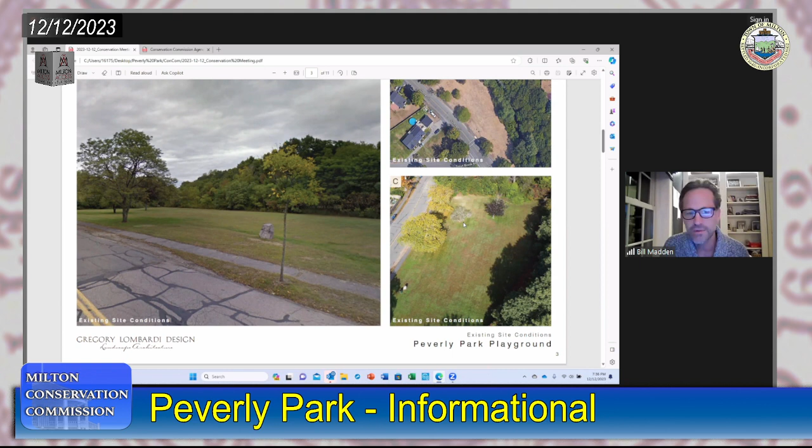To start out, these are some existing condition site photos, and I'm sure you guys are aware of the site. Currently it's just a mown lawn. Some of the activity that occurs here is dog walking and some ball play, but our intent from a neighborhood standpoint is to activate this and create a resource for active play for the local residents and the regional residents of the town of Milton.

The first setback off the brook is the 50-foot off-brook setback, which is this line here. And the 100-foot riverfront area, which is the setback here.

There are a few trees on the site. One is actually dead, I believe, and a few are still struggling, but we're going to try to protect those and enhance them as we bring this project forward.

What you're going to see in a moment is that we've used this 100-foot setback as our prime location for the disturbance of the site. Anything outboard of that is where we're proposing to have the playground, so we can protect the sensitive site inboard of that 100-foot setback.

This image is showing the relationship of this play space, which is here, off of this 100-foot setback, which is here. One of the things we're interested in, being sensitive to the ecology of the site, is that currently a mown lawn is not necessarily good for runoff or the carbon footprint of the site.

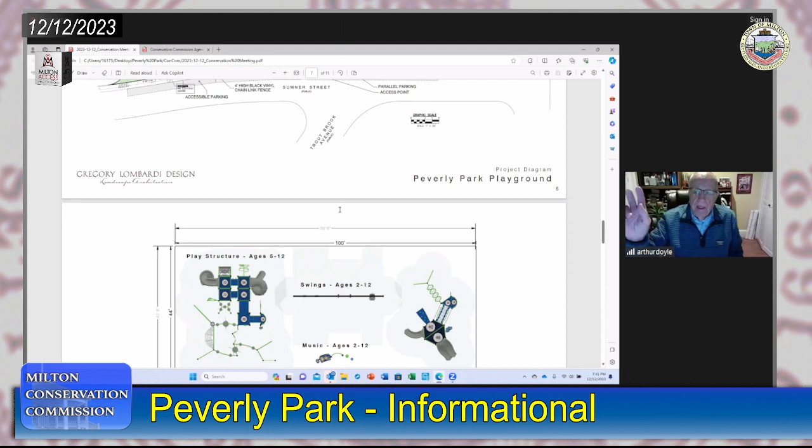And we can come back to this. If I may, can we go back to that frame for just a moment, please? I heard you say that this area with the blue line and the arrow is a mown pathway. Correct, but the citation on the map says no-mow pathway, so you may want to correct that. That's very good, thank you.

So the idea here is red fescue turf. Have you guys used that or made proposals to include that? So that's what we're suggesting to occur here, so it wouldn't necessarily have to be mown. The surface of this area will probably blend into this, but the concept is to make this as minimally intrusive from an ecological standpoint as possible, and it would be a connection to the footbridge.

But we also have a pathway that goes around the pond, up toward where that arrow ended. Correct, so that mow pathway, those two mow pathways, would be very appropriate for connectivity to the entrance into Pope's Pond. Thank you, yeah, that's our intention.

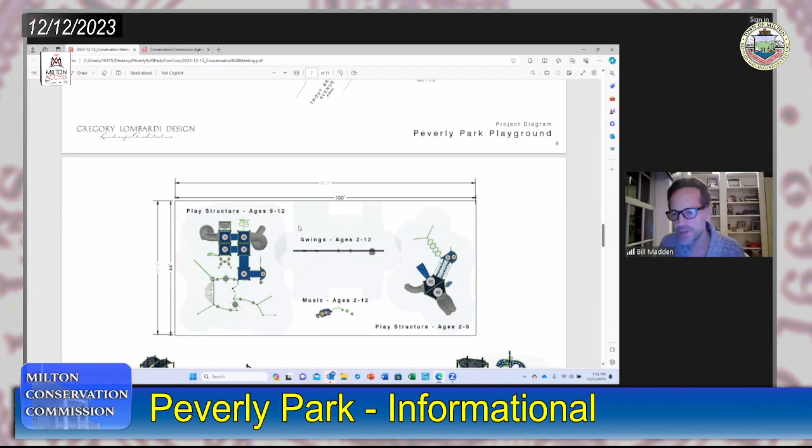Exactly. Okay, I just want to show you some imagery, some precedent images, and then we can go back to the plan. I would love to hear the commission's comments on this. So just as a point of reference, in the play space is more conventional play equipment.

And you can start to see sort of what this layout would be. This would be potentially the troweled rubber surface, fall protection. You can start to see how this is a potential layout. We're meeting with you guys at a very early stage—we haven't even picked the equipment yet. We just did a layout to get a sense of how it would feel in the space.

What is—if you can go back to the previous slide, just scroll up a little bit. No, if they go back, you're right there. Exactly, what is that surface? Is that a pervious surface? Yes. Have you been to Shields Park recently—the new Shields Park? It's the same surface that's at Shields Park. It's a troweled rubber surface, essentially.

And it is pervious—it's impervious. So it does not, you'd have to have some drainage plans to see where the water goes since it's impervious. So the water would sheet off of this. Sure, it would. Is there an elevation change there? My memory is it's pretty flat. It is relatively flat. We didn't want to get too far and start designing the site topography at this point, but we'll start to illustrate where the site is drained for sure.

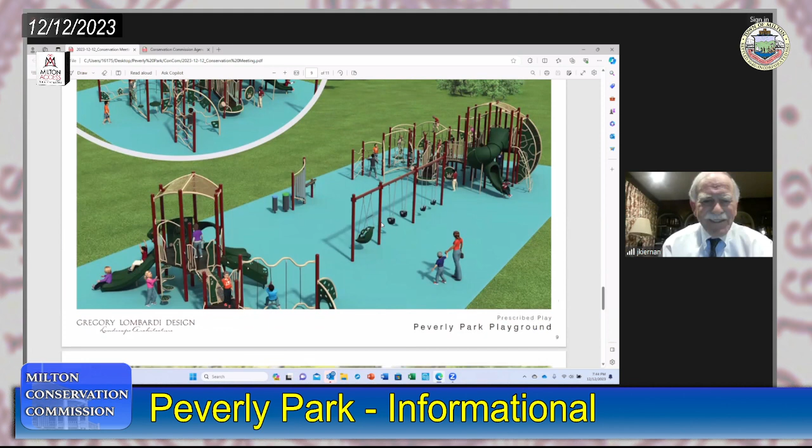Okay, I know this is just informational. Yep, but that will be a question you'll get. All of your comments are valuable for us at this point.

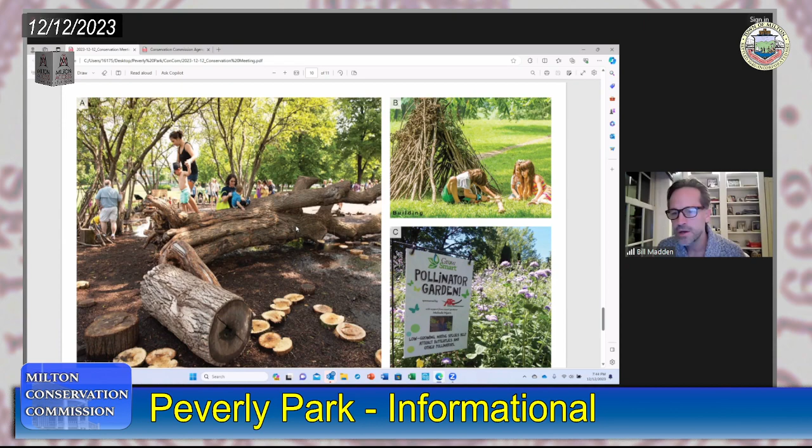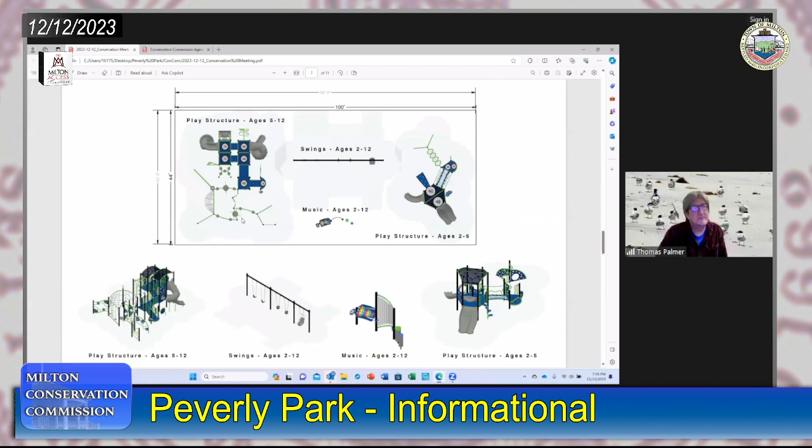That concept of nature play was the idea of turning the current—I'm going to flip to it quickly and then come back to that slide. The idea of taking this zone right now, which is all grass, turf—we have a rain garden here, and John, that sort of answers part of the idea, was that we would pitch some of the water to this low area. But again, we would need approval to modify this grade, so that's a conversation down the line about what level of intrusion we could have into that portion of the site. But the concept was extending that landscape so it would allow for natural elements to be within it, while at the same time, from a social neighborhood standpoint, play could occur.

The notion of adding pollinators, Joe Pye weed, a lot of different native species in here to make this something really special. There's also a concept of integrating this landscape with the local public schools and using this as a learning opportunity with their pollinator gardens. This was the concept of the mown pathway that would be flanked potentially by meadow.

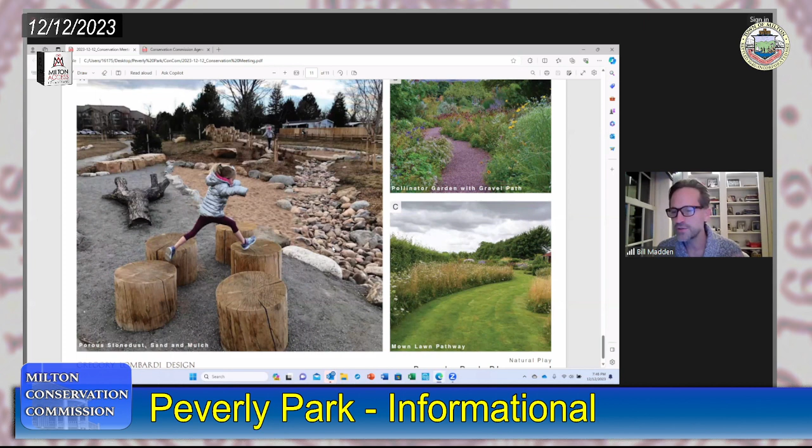These types of play environments—there's not prescriptive play equipment, but you can integrate drainage structures in, with this environment where kids play. It could be a really cool thing that integrates the idea of a very sensitive ecology with the idea of the social ecology of Milton. And that's what we wanted to share with you guys at this point.

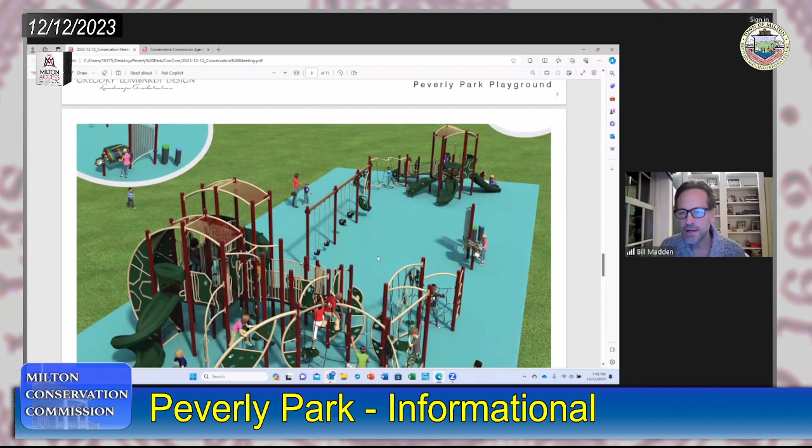So I want to go back to the plan, and I'd love to field any questions or concerns that you guys might have about this. I'm going to stick with this one at this time, just because I know that funding is available for us to execute this project. So I'm all open ears on what comments or concerns we might have at this point.

Sure, I can make a comment—I think your plan is pretty accurate, because I think it was the 1st of December, or maybe the 2nd, there was a team from Northeastern University School of Engineering out there on a site walk, at which Chase Berkeley was there as well, and I was there. We were trying to figure out where the bridge is going to go. And if you look at the top, where you can see the metes and bounds and that sharp point that's white above the blue area.

If you can move your cursor—yeah, right there, exactly right. That is what I referred to as a pinch point of private property, and that's probably the closest the property gets to Pine Tree Brook. That's approximately the location of wetland flag number 60 that's already been delineated there, and that's ballpark the area where the bridge is going to go. Okay, so your design here is prescient.

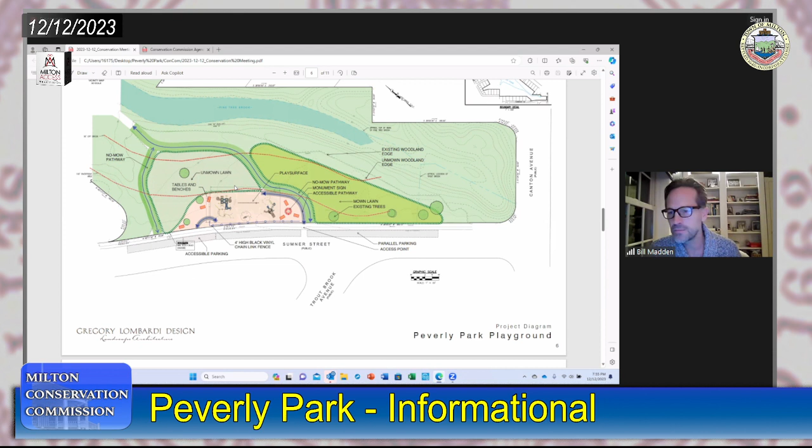Well, if there aren't any more comments or thoughts, I just wanted to thank everyone for your time. We wanted to share this with you because we know this is a very sensitive site ecologically, and also it's such an important site for this neighborhood. So we wanted to make sure you had your eyes on it, and I'm sure you'll be seeing it again once we begin to refine this design over the next few months. Bill, thank you very much.

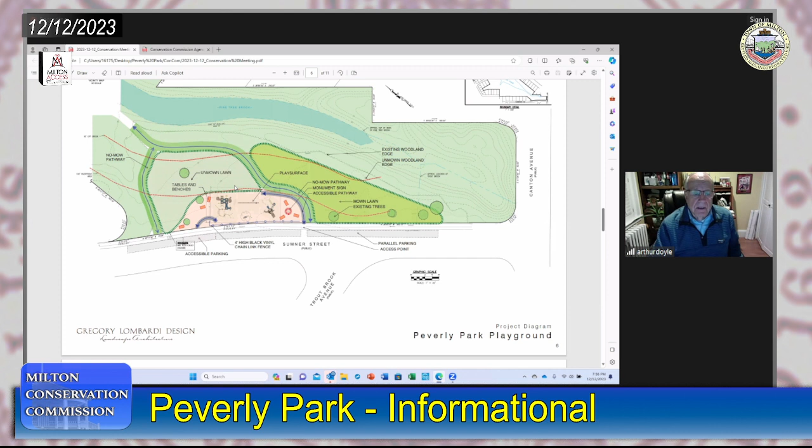Arthur, anything? Or we can move to the abutters or members of the public that have a question or comment. Just to let Bill know, as a reference point, I live next door to the park, the playground at Andrews. So I'm pretty familiar with what you're proposing here, and it really looks good. Great, thank you.

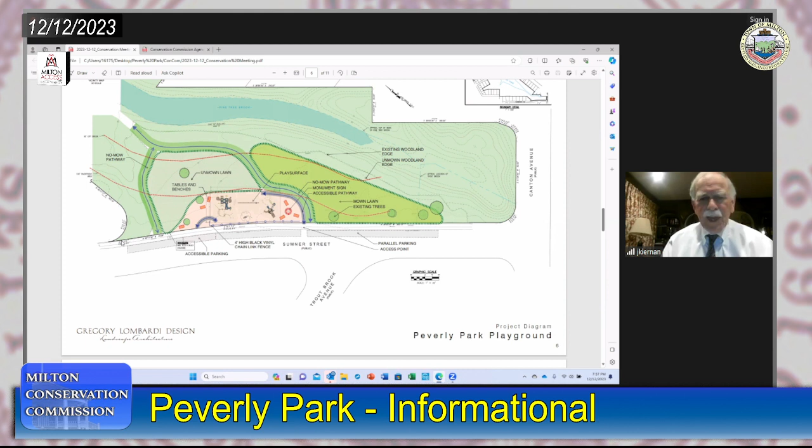Next on the agenda is number 2, request for certificate of compliance at 339 Hillside Street.

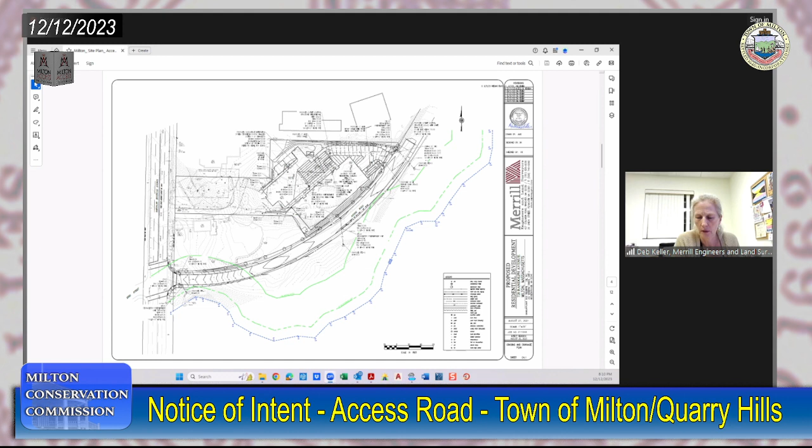So the additional information you're going to get, do you expect to have that, Deb, by the January meeting? When do you think, Rob, you'd be meeting with Natural Heritage again? Well, it's going to be a process, to be honest with you. They've requested some general information; we submit the information, and then, as our discussions continue, Deb, they decide whether it's a take or not a take.

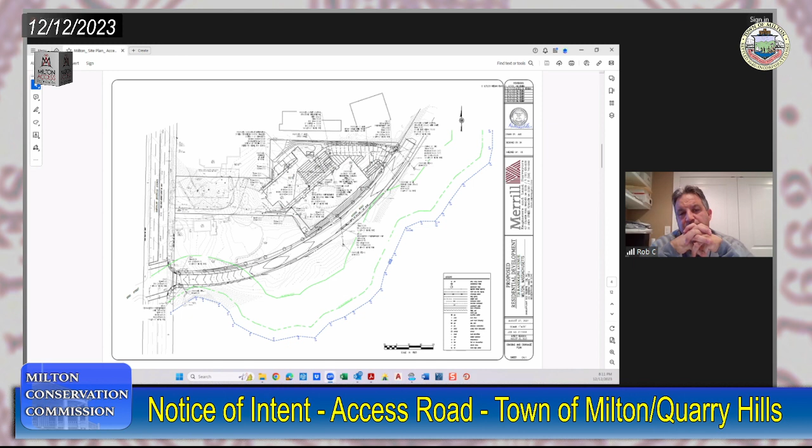And then if they do decide it is a take, it could be a fairly longer process. It's a little complicated too, because I don't own the access road, the town does. And they want to know about any pending projects, basically the extension of the access road, the animal shelters. So, yeah, I wouldn't say January—if we could extend it further out, that'd be possible.

Well, we can continue it until February if you'd like, but I don't want to slow the process down. Yeah, so why don't we do it this way? We continue it until February, but if you get the information faster than you think, we can move it to January.

All right, so at least for the record, we'll continue it to the February meeting, which is—I don't have the date, but it's the second Tuesday in February.

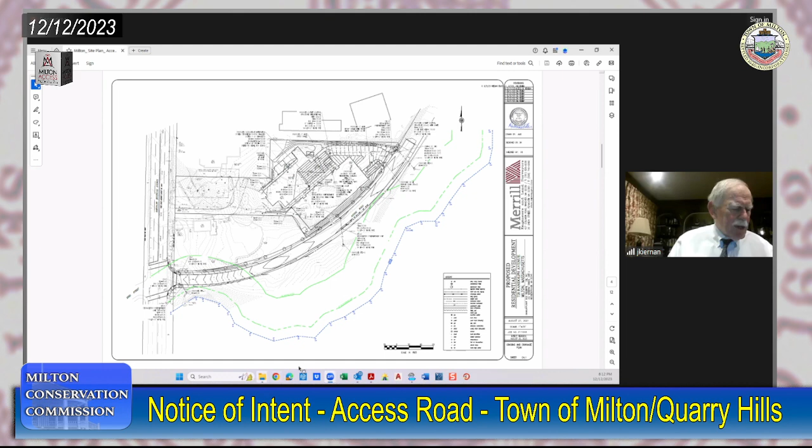Let's go back to number 2 and see whether or not Nicholas has gotten by his technical problems.

Hello, can you hear me? Perfect, there you are, good. I don't know what was going on before. Sorry about that. All right, could you hear us? I could hear you the whole time. Absolutely. Okay, all right, well you're on, and you can screen share if you need to.

And by the way, thank you for sending that—it was certainly clearer to me when you sent the second plan. It might have been the same plan, I just could see it look better. Yeah, when we scan them in, sometimes they don't come through as boldly as the PDF version originally does, so that was not a surprise, but sometimes it's better than others.

Anyhow, I don't have the ability to share my screen right now. I had spoken with Steve about this yesterday, but if someone else could put the plan up, that would be helpful. It's not necessary as far as discussing what was going on out there, though. I just basically had some questions. So Steve, if you could share the screen.

Oh, my name is Nicholas Ling with Grady Consulting, by the way. I didn't actually introduce myself. Thank you, Nicholas. Okay.

While he's looking to share it, I can comment for the public's benefit. We were at the site as a commission in public meeting. Part of the project was to disconnect a water line, essentially going from Hillside Street through the backyard, through the Hillside property to your backyard, and now the water line is coming in off of the driveway. Is that correct? That is correct.

Who is the applicant or the presenter for the applicant? Maria Johnsenberg from AECOM. We're representing DCR, the applicant, and Tom Bolton from DCR is also on the call. Thank you very much and welcome Maria and Tom. Thank you. Maria, I've made you co-host, if that's okay with you. Yes, that's wonderful.

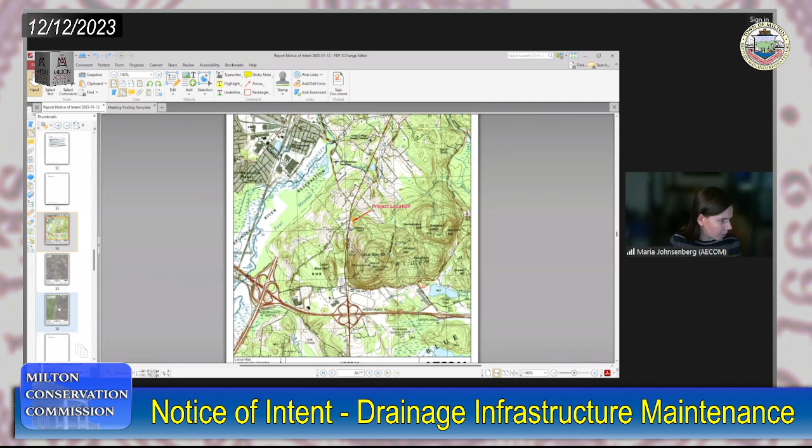We are here to discuss some drainage infrastructure improvements that are needed at the Blue Hills Reservation. So this is the project area, and this is the greater reservation. You can see where it is. It's along Canton Ave, or Route 138, off of the Green Street parking lot area. Here's an aerial picture of it. So here's the parking, and the drainage infrastructure is over here. If I may add, that's the north trailside parking lot. Yes, thank you.

Since this is maintenance of existing drainage structure under the Wetlands Protection Act, it does qualify as a limited project. That said, we are meeting all of the performance standards for resources that are there. But before we delve into that, I wanted to give a little site history. The retention basin here was created in the 1960s and has been cleaned out at least 3 times since then, most recently around 2006. And somewhere between 2006 and now, the vegetation in the basin started being predominantly wetland vegetation. So we have delineated this area technically as a bordering vegetated wetland, but the work being done is only going to remove the upper layer of sand that's part of the retention basin. It's not going to actually disturb any hydric soils.

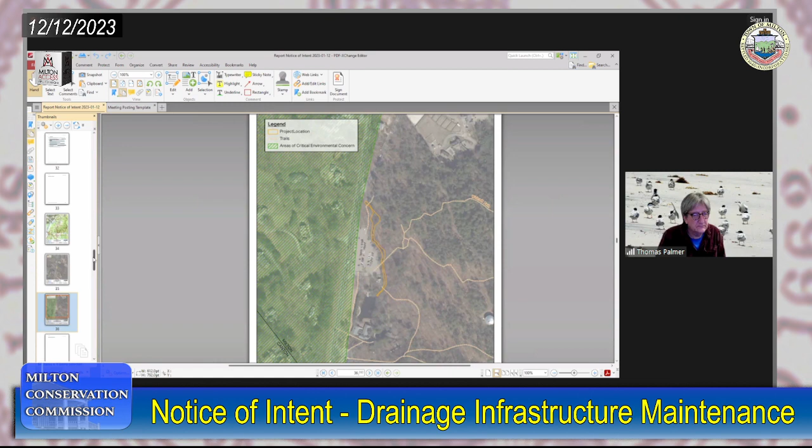So it's a weird spot. It's technically man-made, but it's developed some characteristics over time. There's some small gravel there as well, folks. Yes. I'm just going to go over to the plans to give us a better idea.

While you're doing that, may I ask what the predominant wetland vegetation intrusion is? My apologies, I don't have that right in front of me, that's a little earlier in the narrative. As I remember, jewelweed was there. There's a couple of other herbaceous species. For trees, we have Norway maple and catalpa. For shrubs, it's mostly white pine and glossy buckthorn. And yes, it looks like the herbaceous layer is primarily jewelweed. Sorry, I did not personally delineate it.

No, that's okay, got what I want. I mean, at least a couple of those are invasive species. It's not a particularly diverse spot or ecologically helpful. I read that section, I just wanted to make sure it wasn't intruded by Phragmites as well. No. Thank you.

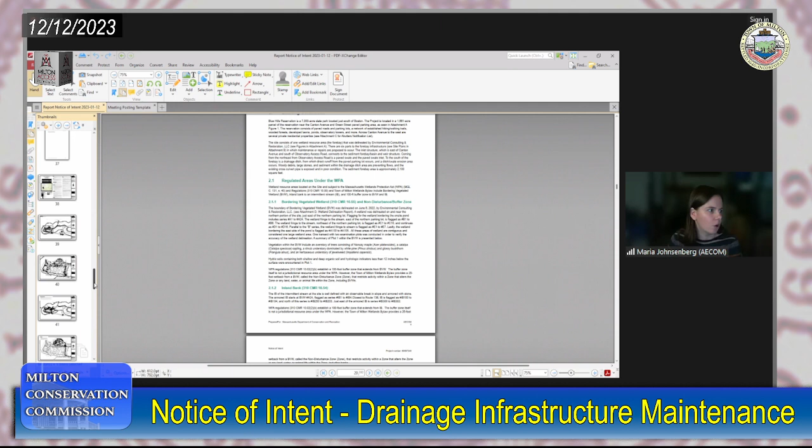So just to give you a clearer idea, these are the existing conditions. This is where the retention basin is. There's an existing concrete weir structure, and the stream that runs through the detention basin goes alongside the parking lot. There's a little bit of debris removal proposed up in that direction, but it's literally just taking stuff off the surface of the stream. There isn't excavation involved, so for simplicity I'm going to focus on what's going on in the detention basin.

So as I said, these are the existing conditions, and this is the excavation plan. DCR is proposing to remove the upper 6 inches of sediment and sand that has accumulated here to bring it back to the elevations it's supposed to be at in order to function correctly. As I said earlier, there is no hydric soil being removed in this, it's really just the sand. The sand or sediment will be removed, staged on site, and then put back in once the other junk has been cleared out.

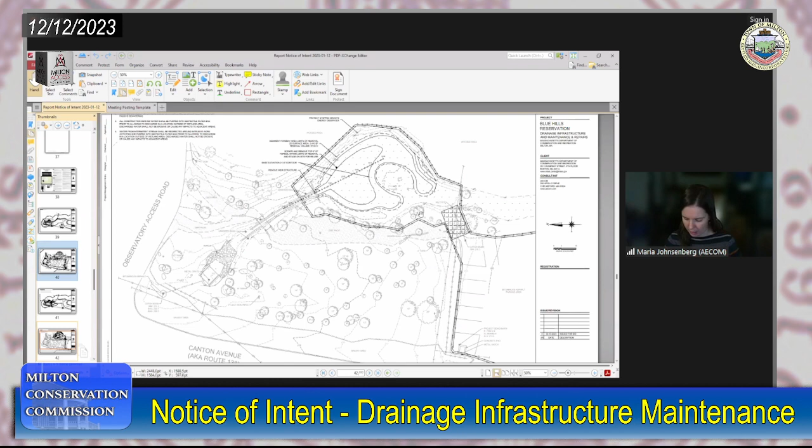I mentioned there's a stream that runs through here, and when the grading is done, part of reconstructing the inside of the basin is to put down erosion control fabric along where the stream channel typically is, to try to keep it from filling in so quickly and to maintain it better. We'll also be revegetating this disturbed area with native wetland seed mix. Below a certain grade we'll use an emergent wetland mix, and above that we'll use a more typical New England wetland mix.

In addition to cleaning out and regrading the sediment basin, we're also proposing to replace pieces of the weir. The existing concrete weir will be replaced with granite slabs, and a portion of the channel will be saw cut and replaced because it's falling apart. The concrete portion of the weir will also be jet cleaned because there's a bunch of sediment stuck in there. This is all just to make this existing stormwater feature function more smoothly, so we can actually manage the stormwater from the reservation and the parking lot the way it's supposed to.

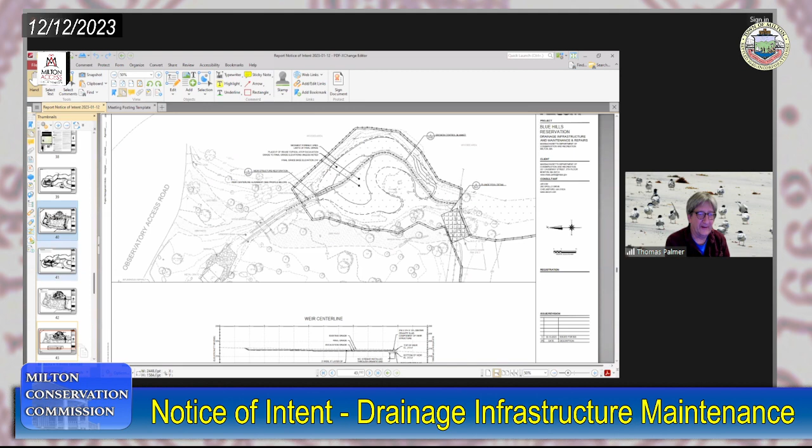So this is the bigger plan. I was focusing on this area because this is where most of the heavy lifting is going on, but this is the stream that goes up here that I think you're asking about with the little bridges. Yeah, there's a footbridge upslope of where you're working. Do you know where that bridge is exactly on here? Are we talking about the footbridge that goes up to the Trailside Museum, or a small one? It goes to the parking lot, and crosses from the parking lot to the so-called border path. So if you're looking at this plan, it would go from the bottom toward the top and then curve left.

I didn't see it on one of these plans. The only bridge that I'm aware of would be right behind the bathrooms. No, this is down at this end, because I've come out of the reservation many times and cut over to the parking lot on this trail, coming down the border path. Just to the point where you can see the parking lot, you can cut over and step over this brook on a little bridge, but you're not familiar with it?

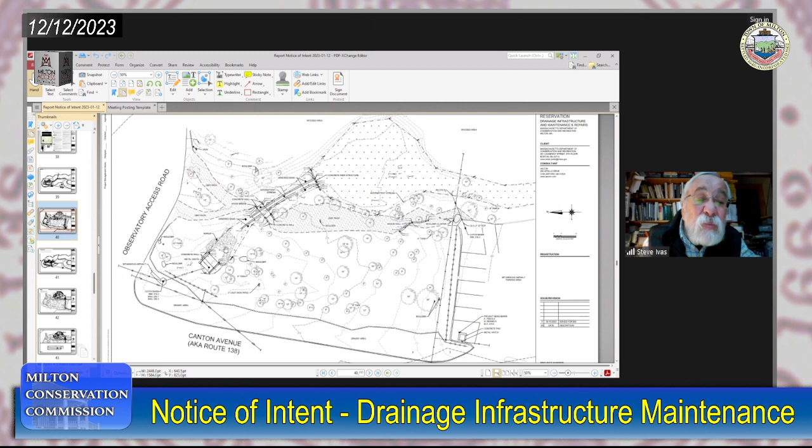It's on one of these plans, Tom. It's shown on this plan, on the left-hand side. Okay, I know where it is. Yeah, there it is, right there. Where? That's on the left. Yes, so that's downstream of the weir. Oh, right here. Yeah, that's correct. You're right, I'm sorry, I thought it was the other side.

I just want to point out, if you walk up that path toward Observatory Road, it's very eroded and a lot of water breaks out there. Have you noticed that? A lot of water comes down that slope, coming down Observatory Road. Yes, there's a paved swale that dumps into the sediment basin that's coming from there. It also breaks out of the ground too, and a lot of tree roots are exposed because material has been carried away, and it breaks out.

And it might be because there's a pipe that leaks. There's a big tank up the road there, presumably with infrastructure, piping associated with it. Do you know where that piping is? No, I don't. What kind of piping did you say broke out? Well, there's a pressure tank if you go up Observatory Road. Yeah, there's an enormous tank in the woods. I am aware of that. Well, I don't believe there's been any flows from domestic water or that tank, to my knowledge, anyway. I've never been told that.

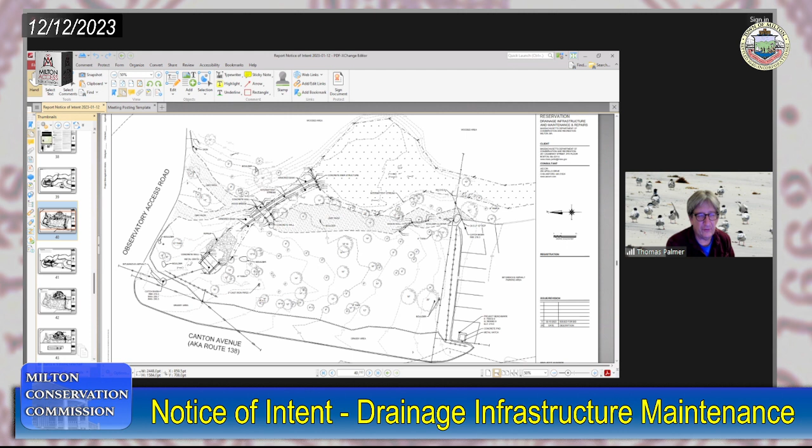Well, just the place I pointed out, everybody knows the water comes out of the ground there and washes the trail away. Everybody uses that area. So I'm just wondering how it might affect your plan. It seems like it won't in any particular way, but could you tell me where you think all the debris is coming from that's getting into your system?

Upstream, so it's coming from the brook and from the pond. This stream originates from the man-made pond in front of the Trailside Museum. And sheet flow from the parking lot area too, I would think. Yeah, I would agree the parking lot gets sanded sometimes and might contribute sand. There's an extremely large amount of sheet flow that comes from down the mountain during rainstorms too, only during rainstorms, that's probably washing silt and debris down to the brook that runs parallel with the parking lot, which eventually ends up in the sediment basin.

So after thinking about it a little further, I think that's probably the major contributor to most of the sediments coming into this basin. All right, well, I'm glad that you're getting after this, and it seems to me you're doing it appropriately. Thank you.

Any other comments, questions from commissioners, or members of the public? I just wanted to compliment staff, if I may, Mr. Chairman, on the quality of preparation. Good, very helpful, well said, thank you. John? I'm happy to see this being done, okay? I'm happy to see it being done. Oh good, yeah.

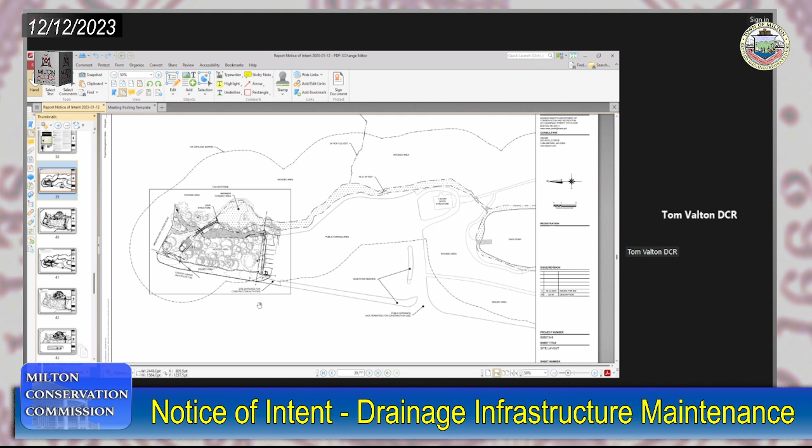Now, the only question I've got remaining is that when we issue an order of conditions, we do have standard conditions to refuel and store hydraulic equipment outside of our jurisdiction. You've got plenty of parking space there. Tom, do you think that's an issue, or Maria? We have a designated laydown area within the plan set. It's mainly near the entrance and exit to that parking lot, on the north end side. We were going to fence off an area there. That's not an issue, to answer your question. We can certainly make sure to keep the equipment outside the buffer zone.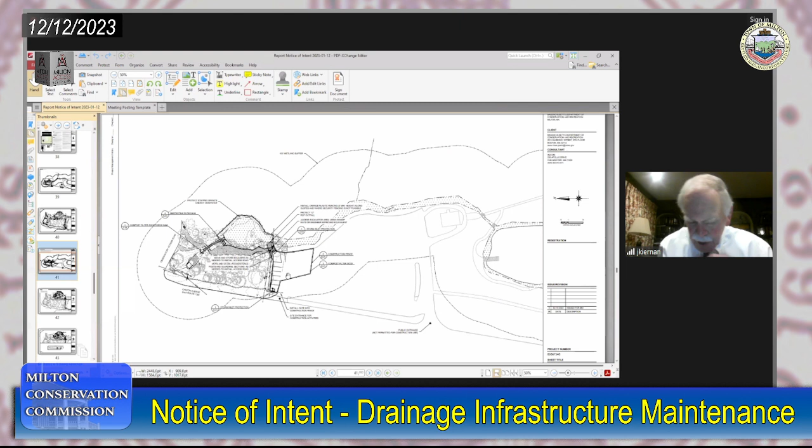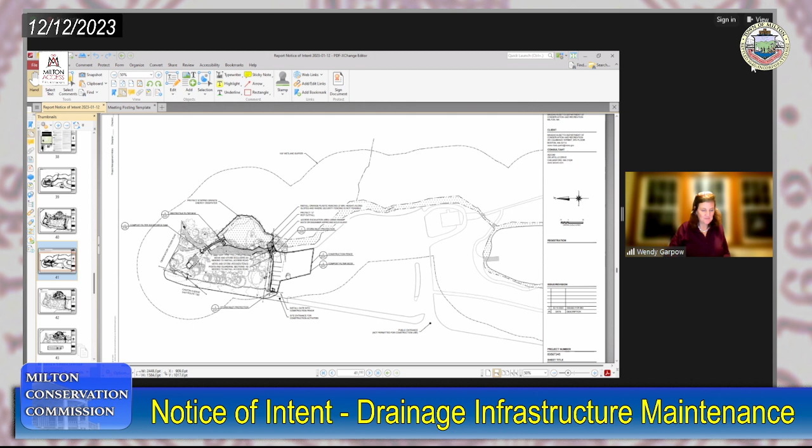Perfect, that's great. Well, with that, is there a motion to approve the order of conditions with our boilerplate standard conditions? Wendy, is there a motion? Yes, so moved. Is there a second to Wendy's motion? I'll second. I think we get two seconds. Perfect, any discussion?

Hearing none. Arthur, how do you vote? Yes. Tom Palmer, how do you vote? Yes. And Wendy, how do you vote? Yes. And I, John Kiernan, vote yes as well. So you've got a unanimous vote.

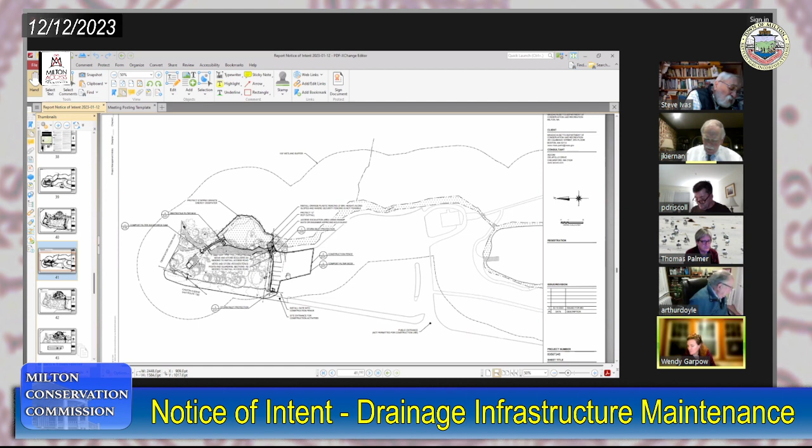All right, good members. Next, we have number 5 on the agenda, request for determination of applicability. This is the MBTA Mattapan Station Program, Milton Station Sloped Walkway.

Do we have a presenter with us tonight? Yes, this is Jeremy Fontaine from MBTA. Jerry, welcome. Thank you. I'm here with two other members as well, Mike Turgeon and David Whitman. So this project, like you mentioned, is the Milton Sloped Walkway, and this is an ADA accessible means of access to the MBTA Milton Station from Adams Street. And I will let the consulting team, Mike Turgeon, present. I think he has provided the commission with a presentation to share. Thank you.

Is it working? There we go. Good. I think, well, thank you, Steve, and thank you, Jeremy. I will start with page 18, which is an aerial photograph of the site.

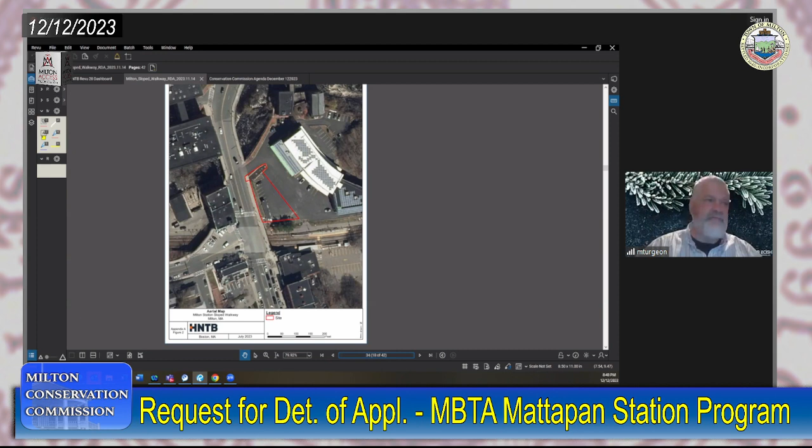Now I'll switch to the proposed conditions. This is Adams Street here, the tracks, the platform, the trail with the access point to the parking lot, and over here you have the sidewalk. The river is over here, and then the granite wall comes down along this line here.

The proposed project is to do a saw cut in this area, remove the pavement, and then install an 8-foot wide ADA accessible sloped walkway that comes off the sidewalk and comes down here in a gentle slope. There's a landing here along the tracks and the rail and the Neponset Trail, and then it comes out over here onto the trail and then the platform. The catch basins that I was talking about are located here and here.

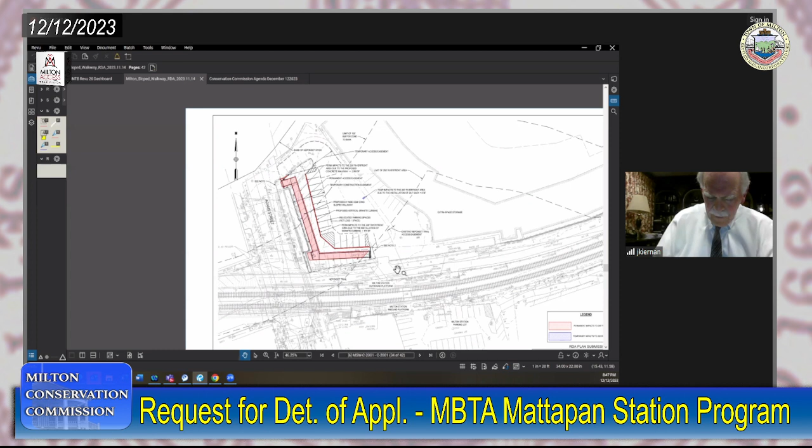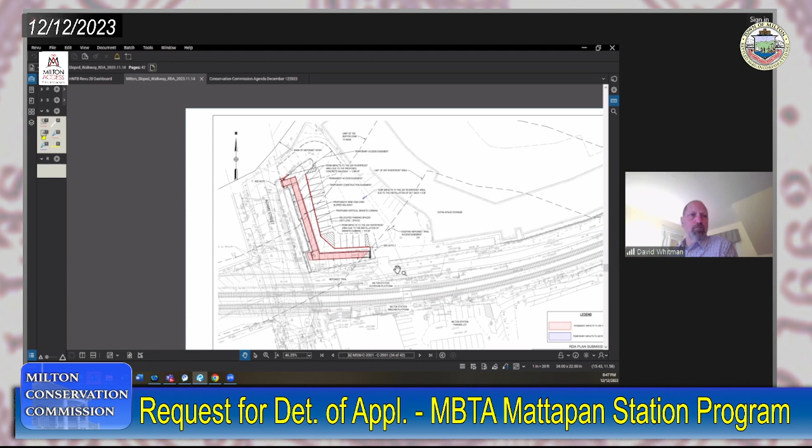I have a question, Mr. Chairman. Yes, go ahead. It's not clear to me based on what's in our packet and what you've described, if there's any sort of distinct delineation between the access ramp and the rest of the paved area that's currently a parking and traffic area.

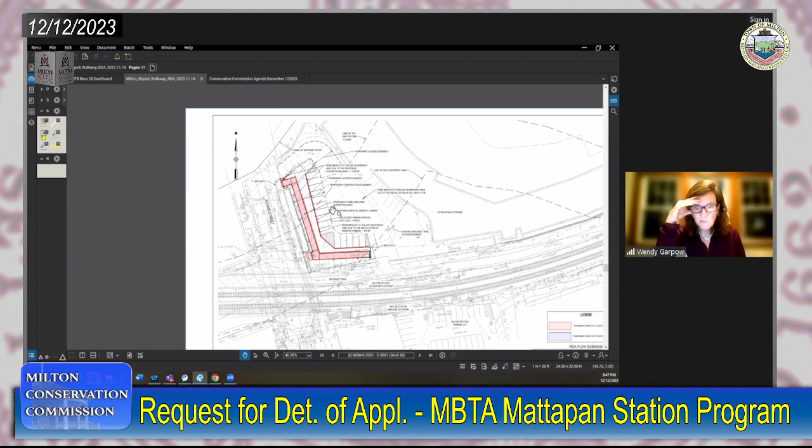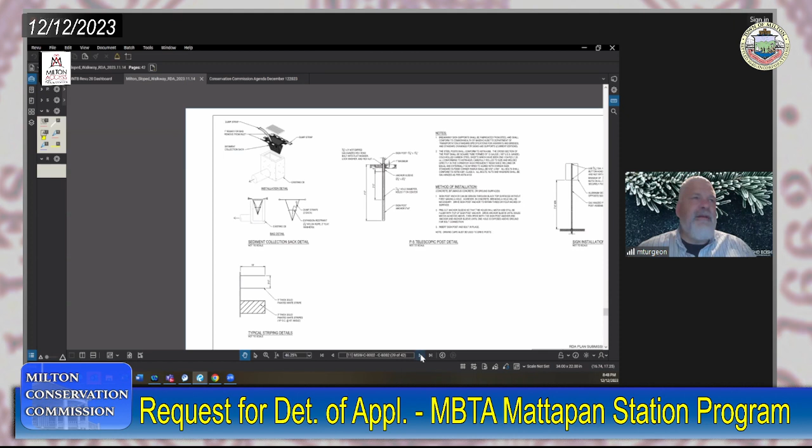So there'll be plantings and a railing. A railing, okay, let me go to the planting. There's a railing that will go along the eastern side where the granite wall is, and then there'll be a railing on the far side that comes down along here, and then there's plantings between the railing and the parking area, and a concrete curb as well.

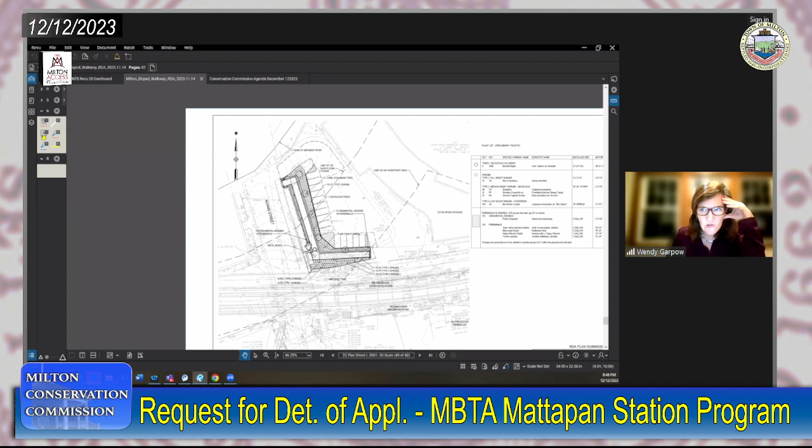Is there a wall on both sides of the ramp, or I thought there was just a wall on the side closest to... There's an existing wall up here, the granite wall, and then there'll be a railing, and then this area here is graded down to a curb. I will show the grading plan. So it's graded down, there's no wall there. Yeah, Mike, if you go to the next plan to the section, it might help.

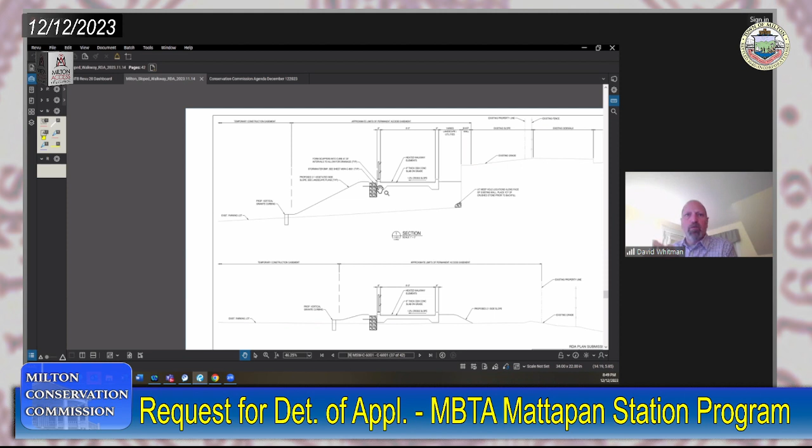Our intention is to have a 2-to-1 side slope all the way from the walkway down to the parking lot, and a pedestrian handrail on that side of the walkway itself. So one of the big benefits is the whole side slope will be a vegetated side slope with plantings and grasses and things. And the big benefit of this is we're reducing the impervious amount of material in the parking lot by over 1,700 square feet. Yeah, that's great.

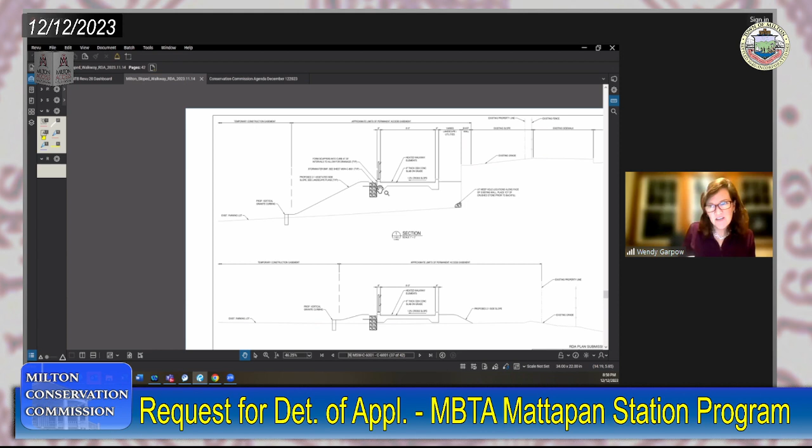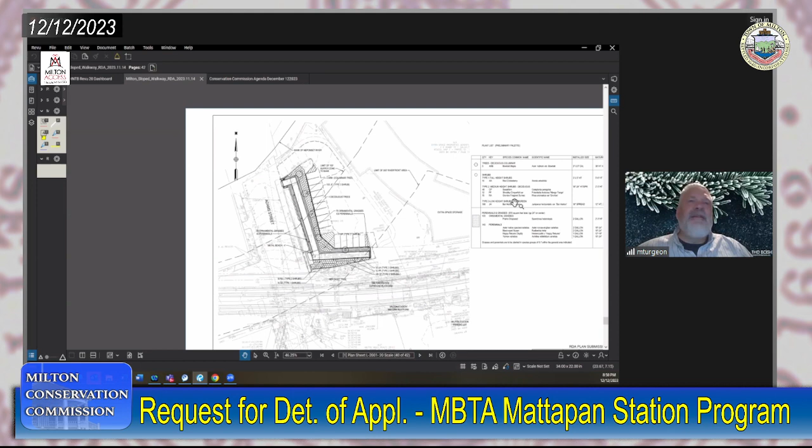It is a sea of asphalt at the moment. Exactly, and this is going to be a big improvement on that. And you said that you're going to be putting in how many trees? 5 trees. There's a list on the planting plan. So we have 5 maple,

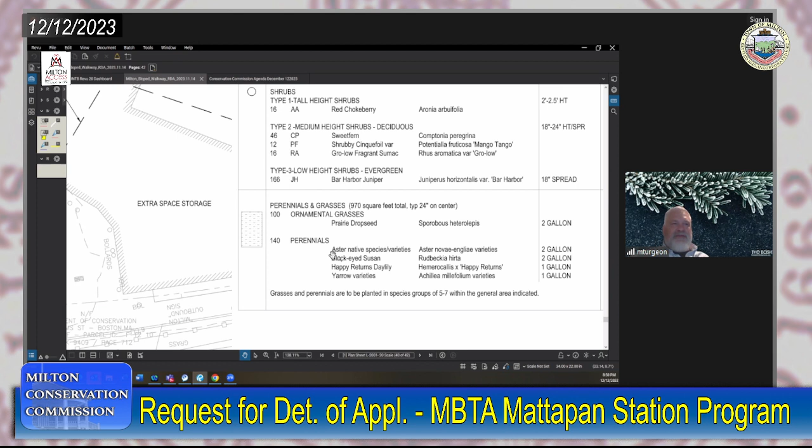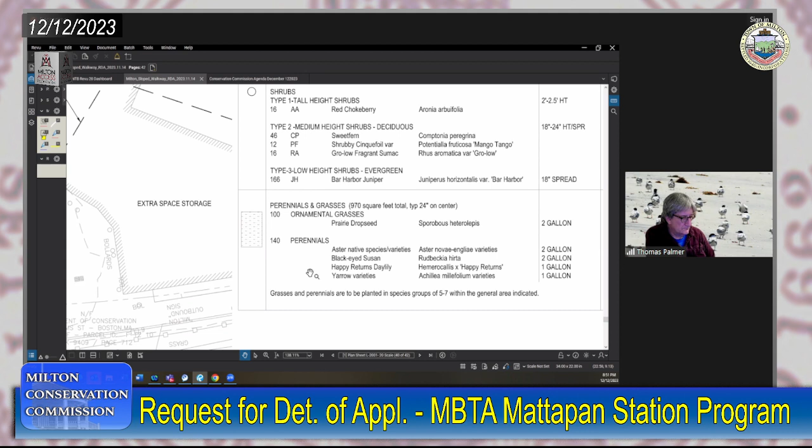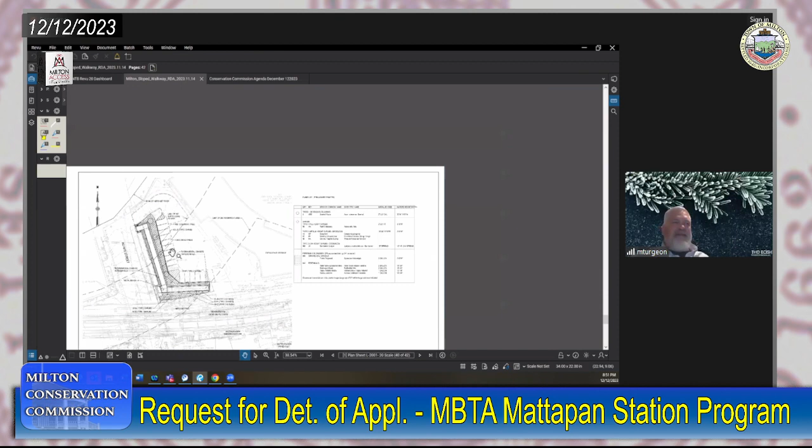16 chokeberry, 46 sweet fern, 12 shrubby cinquefoil, 16 fragrant sumac, and 166 Bar Harbor juniper. And the grass mix is a prairie dropseed, and the flower mix includes asters, black-eyed Susan, happy returns daylily, and yarrow. Okay. That's on this sheet, which is the landscape plan, page 40 of 42 in the PDF, so it's 2 sheets in from the end.

So again, to reiterate, the big improvement here is we're reducing the impervious material by a pretty substantial amount, and we're pretty excited about that, to be able to help reduce runoff and things like that in this area.

Does anyone know where those catch basins discharge to? That I do not know. I'm not sure, Mike, if you know. You want to guess? I'm not sure. We are proposing silt sacks in both of them, but I'm not sure where they go to. I don't know myself. I guess they're associated with the old mill buildings, and maybe they go under them to the river. I don't know.

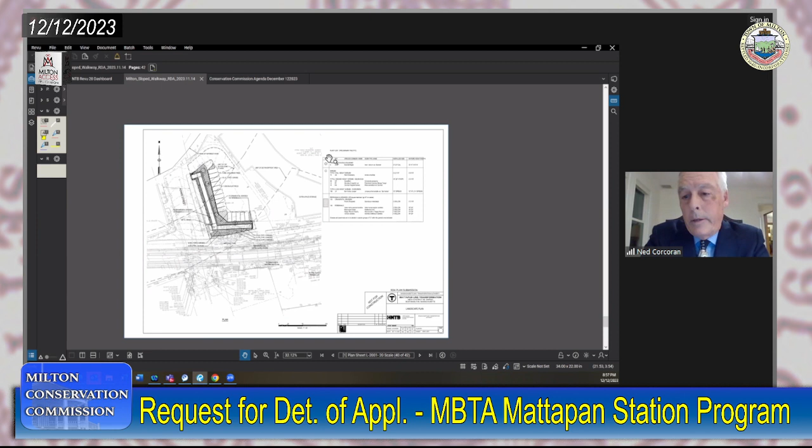I'm not privy at this point to discussions between the MBTA and Extra Space with respect to easement acquisition along this area. Understood, all right, thank you.

Any other comments, questions from abutters, members of the public? And certainly for commission members? Bill Gallagher, you've got your hand raised.

I walk that pathway almost daily, and just looking at the aesthetic part of this project, it would certainly enhance the area and the psychological enjoyment of walking, as far as the planting and vegetation. I understand the environmental issue it raises, but I'm focusing on the appearance, and it's superb, and would certainly enhance my daily walk down there. So thank you. Thanks, Bill, for your insight.

All right, any other questions? I can't see the whole screen, so Steve, you might be able to see if there are any other hands raised. It doesn't appear so. Sorry, Wendy?

Yes, I have another question or comment. I'm wondering if it's possible to increase the number of trees, and possibly if we could utilize some of the—I'm blanking on the actual name—but the boxes that go in the base of trees in urban environments for treating the stormwater. What are those called? Filter boxes? Yes, filter boxes, yeah.

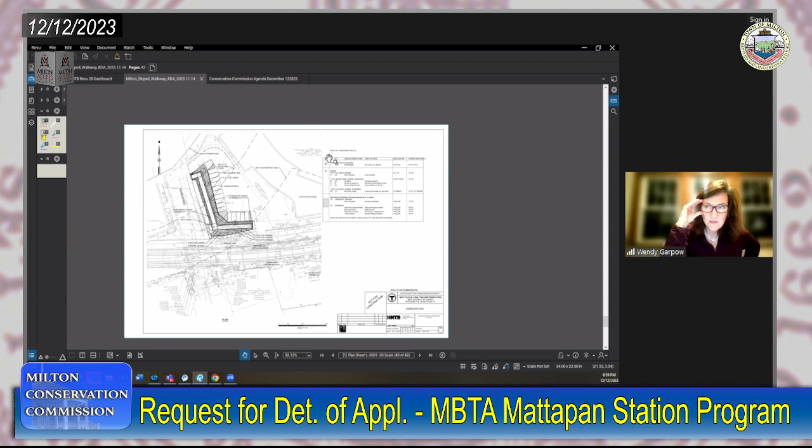It's such a sensitive area, as we were talking about. It's literally a sea of asphalt, and there's going to be a lot of cars still going through there. I see there's some parking delineated along the walkway now. I think it would be a great opportunity for us to capture and treat some of that stormwater runoff.

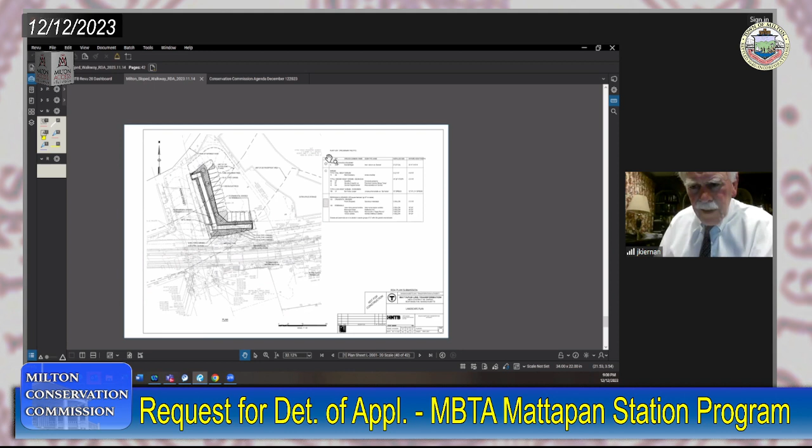What do you think, Mike? That sounds like a pretty good idea, Wendy. Go ahead, I think Dave has a response. Okay.

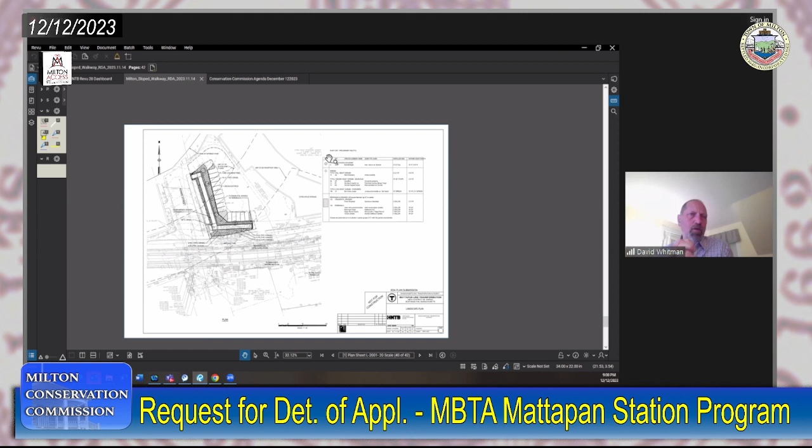We appreciate the appreciation for the project. The intention of this walkway is that we have a BMP stormwater system located along the right-hand side of the walkway. So all the walkway drainage will be directed towards the stormwater BMP, which will collect and recharge water, so there's no other stormwater reclamation needed. We have a specific number of trees, but there's only so much space to put plantings as large as trees, so we have a lot of ground cover that will recapture a lot of the stormwater.

Again, the biggest factor of this project is the reduction of impervious material in this area, reducing that discharge. So I think there's a safety component too, in placing the walkway and separating it from the parking area.

Correct, that's right Mike. So now you're getting walkers who aren't subjected to people moving around in the parking lot. The current access easement goes through the parking lot, but this is a protected pedestrian walkway that'll benefit everyone, pretty much all the pedestrians who go into the station.

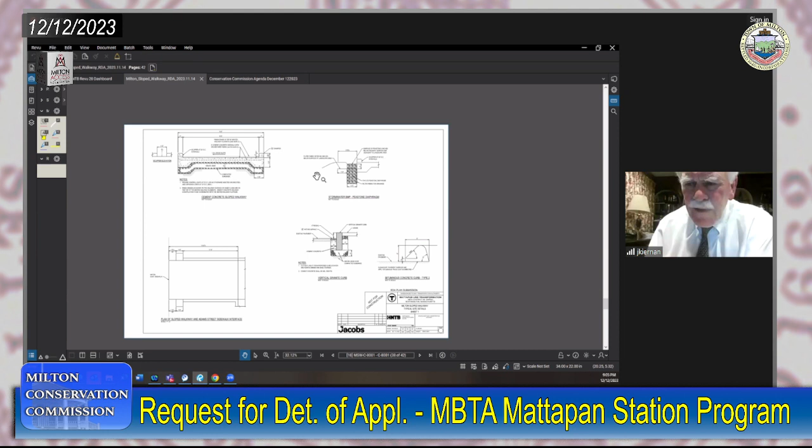So we want to be very careful with that. And the other thing, as you may have heard from some of the other discussions tonight, is we do have regular conditions that we put out. I always call them boilerplate, but they're standard conditions regarding refueling and storage of the power equipment, especially the hydraulic lines. If you're using backhoes and things like that with lots of hydraulics, they're always popping, so we need assurances of spill control plans, and we want them stored away.

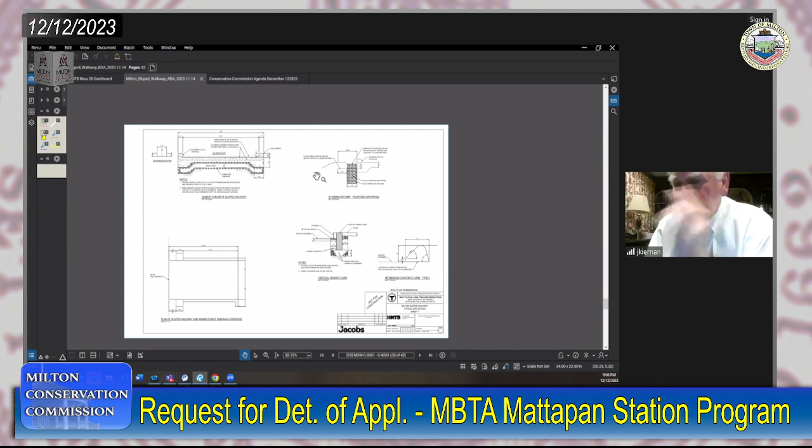This is a particularly sensitive area with the drainage where it is, because that sea of macadam flows right to those catch basins. If we've got a couple of bobcats sitting there and they pop some hoses, that's exactly where the water's going to go, right into that smelt hatchery. So we want to be very careful about that, and I think that's reasonable. I'm sure the MBTA would be delighted to comply with those standard conditions, and I think we can add some language in our specifications to make sure your erosion control standards are adhered to.

Well, that would certainly be part of the negative determination for an RDA. Any other thoughts or comments on that issue or any other issues from commission members? Hearing none, any other thoughts, comments, questions before we move on to a motion to issue?

I think there's a general consensus of support here for a negative determination with at least the conditions that I mentioned in terms of erosion control, spill control, storage outside of our jurisdiction, and certainly refueling outside of our jurisdiction. Other than those, are there any other suggested conditions for a negative determination?

Hearing none, is there a motion to issue a negative determination with the additional special conditions? I'll move that we issue the negative determination. Is there a second to that? I second it, John. All right, thank you.

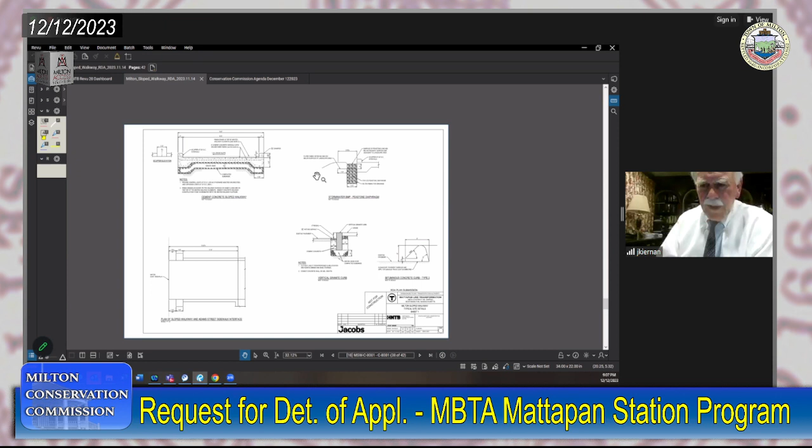Any discussion from commission members? Hearing none, we'll take an individual vote. Arthur, how do you vote, sir? Yes. Tom Palmer? Yes. Wendy? Yes. And I, John Kiernan, vote yes as well. So that's a unanimous negative determination with the specific special conditions mentioned.

Thank you very much, all. It sounds like a good project. Thank you. Thank you so much for your time. We appreciate it. Thank you. Good night, all. Good night.

Night. Next on the agenda is notice of intent, 38 Barton's Lane.

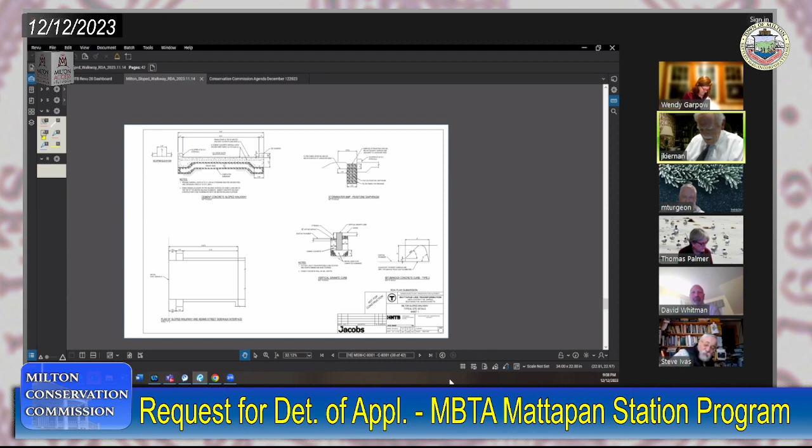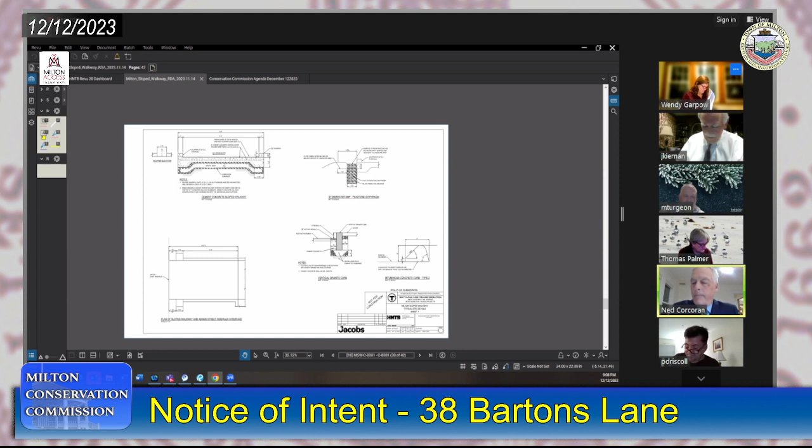Good evening, John. Ned Corcoran, for the record, on behalf of Paul and Suzanne Barry, who are the owners of property at 38 Barton's Lane. This is sort of the second piece of some relief that I am securing for the Barrys. The first was a variance to allow modification to the dwelling that exists at 38 Barton's Lane, an area that was outside of the ConCom's jurisdiction, towards the front. The building is now under complete renovation, basically a big gut rehab, and work is ongoing.

I think Steve has visited the site and seen that there's good solid erosion control in the backyard between the work and the wetland. We filed a notice of intent, and included in that is approval of the wetland delineation that was done a couple of years ago by Russ Waldron. So I think the first thing for me to do is ask Russ to briefly describe the delineation.

It strikes me that the commission would require a site walk to approve the delineation and issue a notice of intent. But Russ, if you could describe the delineation, and then I'll hand it to Karen Gosselin, who is a landscape architect, who will describe the work proposed within the 100-foot setback from the wetland. Sure thing.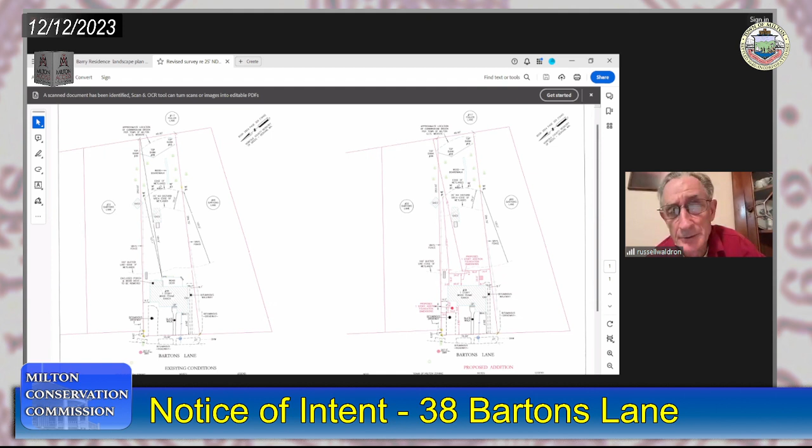Russ Waldron here from Applied Ecological Sciences. So I flagged the property a year ago October, and it's a very short delineation of a short section of BVW. I made 4 flags, and also a very short section of a stream that flows down through the wetland.

As I recall, I believe the wetland edge is very close to the edge of the lawn. Looking back at my data sheets, I didn't do soils, and I believe that was because it was just lawn on one side and the forested wetland on the other. So the break was pretty obvious. Beyond that, it was a straightforward delineation, no big surprises or challenges to it.

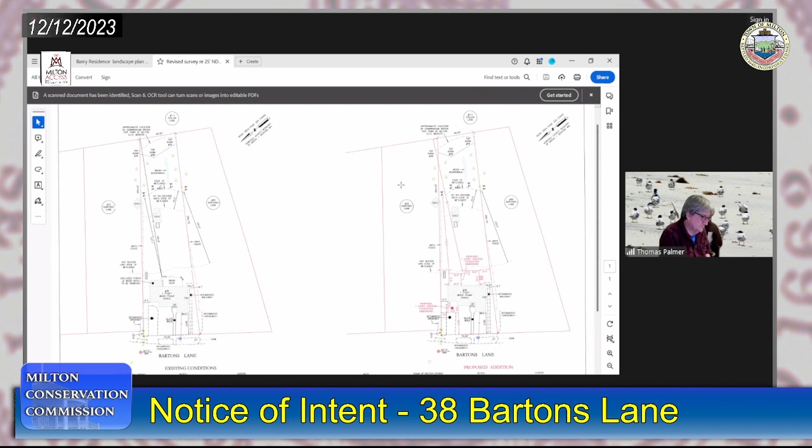So we submitted this plan, which shows the 4 flags along the wetland with the 25-foot line and the 100-foot edge of jurisdiction. I'll stop sharing this unless you have questions.

Within the scope of the work, there is an old wooden boardwalk within the wetland that feeds from the lawn towards the bank, which is in really poor condition, and the Barrys seek permission to remove that. We'd remove it by hand, not using any mechanical tools within the wetland, along with a bench which is just within the edge of the wetland itself. They plan to remove that as well, and you'll see that on the site walk.

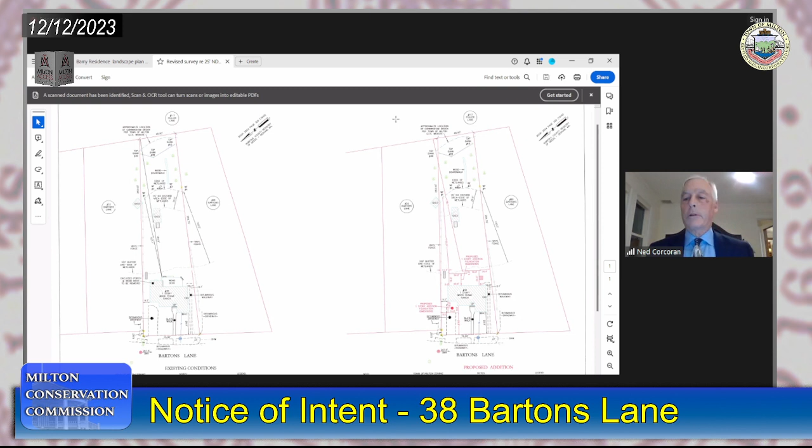So unless you have further questions for Russ, I'll stop sharing and then produce the landscape plan. It was recently modified to address the question that Steve had regarding native species versus non-native species for plantings within the 100-foot jurisdictional area.

Ned, before you move on—just a question about the patio. What's the net increase in impervious surface? That's a good question, because I think currently there is no impervious surface where the patio is going. But let me share again and pull that up. Let's see, I need to do one other thing first.

You all see that? Yes, that's perfect. Thanks.

So again, the edge of wetland is here. The 25-foot no disturb is here, and you notice that there's a silt fence proposed for the control of runoff, and then the 100-foot is here.

So this patio area, and a portion of this patio area, is all new and doesn't currently exist. This is all lawn at the moment.

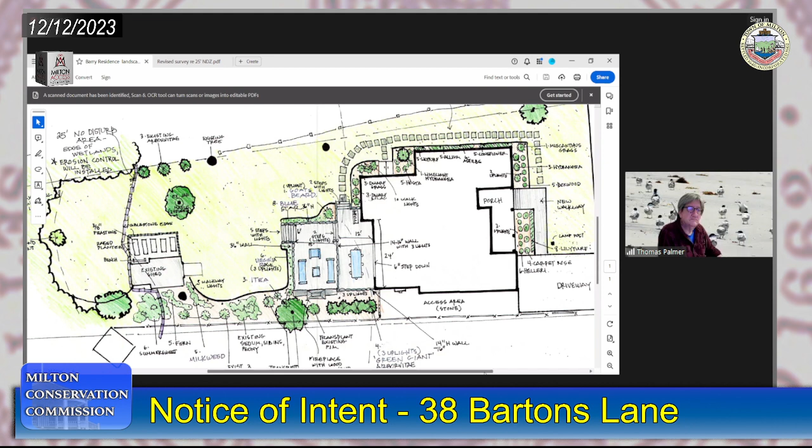So I know for the patio it'll be like a 2% slope, probably straight down away from the house, on both patios. So it would drain onto the grass and the planting beds. Understood.

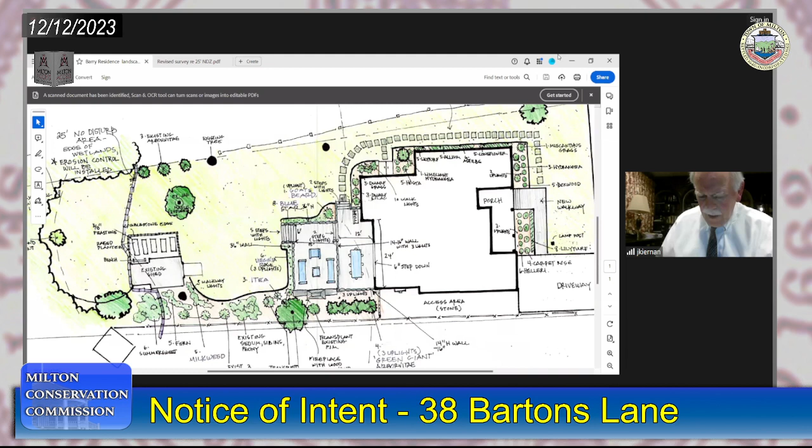Okay, well, let's try to get it done this Saturday. I'd like to have a quorum if possible, so we'll have to do it right away. So Philip, we'll have to do an agenda or a notice for this Saturday, and I know we're close on time. But if we could announce it tomorrow, we'd be in compliance with the open meeting law. So let's do it, and then if we can't get a quorum, we can either cancel the site walk or use those that show up as a subcommittee, but any kind of a vote would have to go to the January meeting. So I guess what I'm saying is let's announce it as a meeting for this Saturday at 8:30 at your home at 38 Barton's Lane.

And it shouldn't take long. If we can get a quorum, great. If not, we'd have to kick the vote to January. Would we need to sort of continue the hearing also to the January hearing just to protect the open meeting? Yes, please. Yeah, that's a good point, Ned. Thank you.

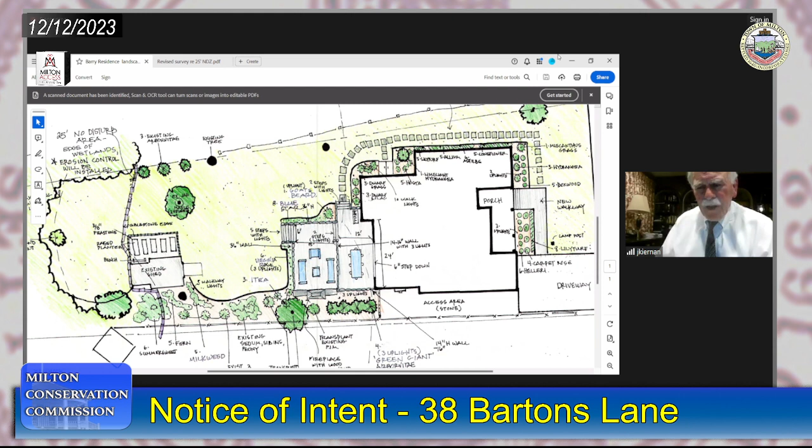All right, so Philip, if you're taking notes on that, it's important that we have the assent of the applicant to go to January, but we'll try to get it done this Saturday if we get the quorum. That'd be great. Okay, I'll post it in the morning. All right, any other questions from commissioners? John, this is Steve, I think I can make it as well on Saturday. You can. All right, thank you. Yeah, I'm sorry, I didn't ask, because you're an important component.

All right, thank you. So any other questions, comments from commissioners? Other abutters or members of the public that have a question or would like to make a comment? I don't see or hear anything, so hopefully we'll see you at 8:30 at your house, Mr. and Ms. Barry, on this coming Saturday, okay? Very good. Terrific. Perfect, all right. Thanks all. Thank you. Thank you.

Next on the agenda is notice of intent, 1365 Canton Avenue. 8:30 Saturday.

Who is presenting on this one? Brendan Sullivan with Merrill Associates, representing the owner, Sabi Torkey of 1365 Canton Ave. And Brendan, I just made you co-host. Okay, great. Thank you, Steve. Sure. Perfect.

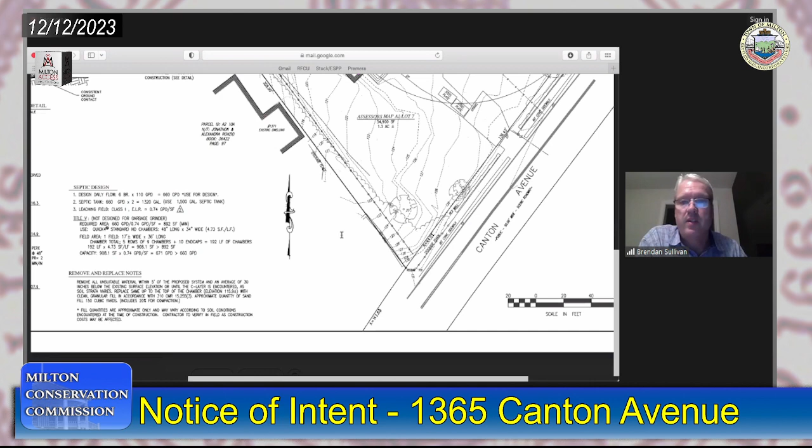So hopefully you can see my plan up there now. Yes. So if you remember, there is an existing order of conditions out for this site for some work done in the back of the property. This is 1365 Canton Ave. It's on the north side of Canton Ave, a single-family home, currently under construction. There are some off-site wetland resource areas, BVW, and also a brook in the back, which is also a river. So we have some buffer zones and riverfront areas on the lot. What this component of the project is for is the repair or construction of a new septic system.

So we did some test pits out in the rear of the property and found some decent materials. So we're proposing a subsurface infiltration field for the septic system in this area here. The system itself, the overdig, is approximately 168 feet from the riverfront, from the river off property. We are outside of the 100-foot buffer. We did add this red line here as additional siltation controls for the construction of the septic system. We have a septic tank that just kind of crosses the 200-foot buffer. It's positioned there because of the existing pipe coming out of the house and the setbacks we need to require for the foundation. It goes by gravity from the septic tank into the D-box and into the infiltration chambers. And that is really about it.

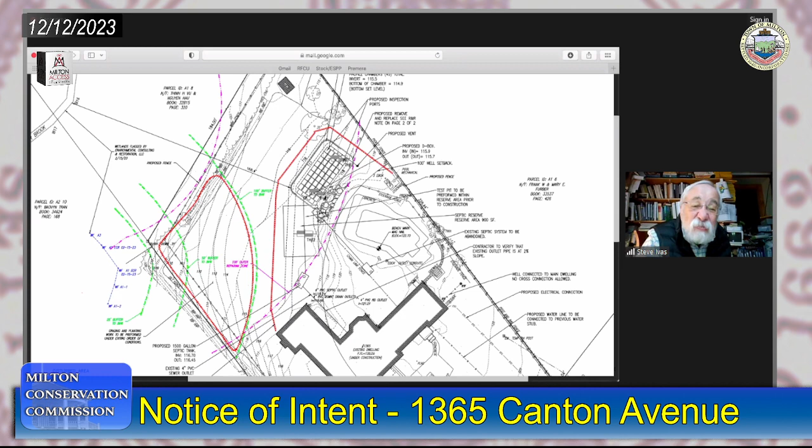Looks good, John. Yeah, and for the public's benefit, we've been here quite often, just in the last 12 to 18 months.

Does anybody feel a need for a site walk? No, I do not, but someone might. This is the area where we issued the order of conditions for the movement of the wall dividing the properties and the grading, because there were significant grading changes. Right, and that's happening down the northwest corner of the property, the upper left-hand corner of the property. Has that already happened? No, I don't believe it has. I don't believe any of the site work has happened on site.

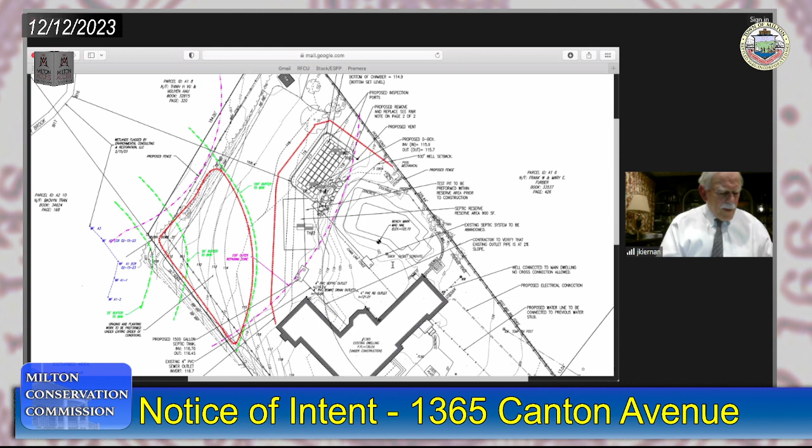Well, with that, I'm okay with the notice of intent with the usual conditions. And it is on the left-hand side in the back there — that's a pretty sensitive area, of Balsam Brook. And we've got, that's Mr. Vu's property in back there, correct? Yes, at the rear of that. So we've been on both sides of that property line several times in the last few years.

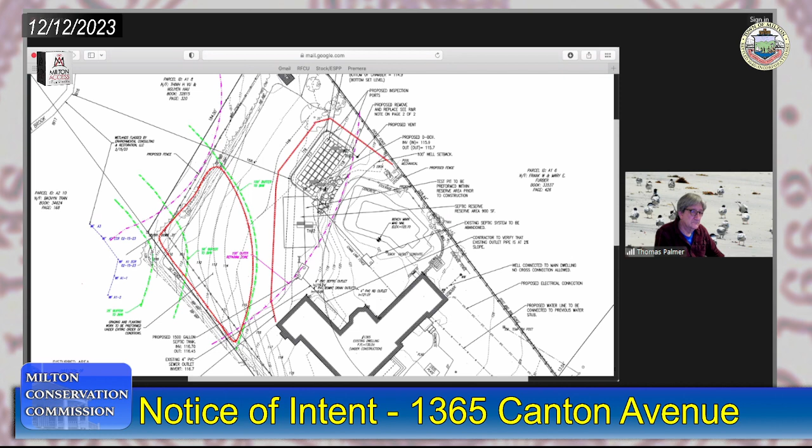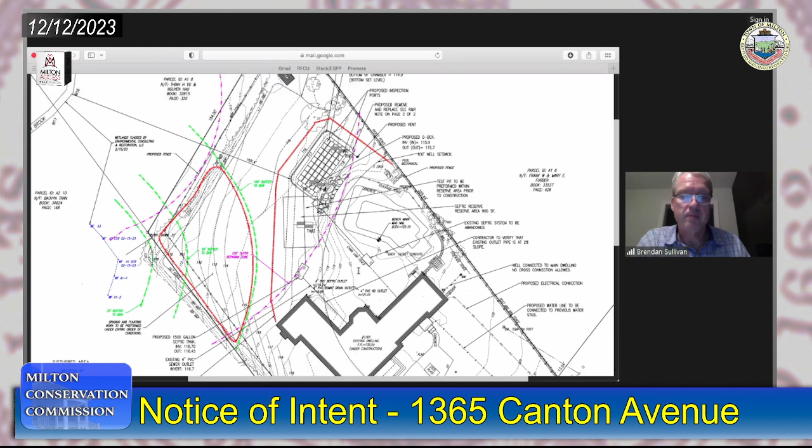So the erosion controls will be a big issue for us as a special condition, and certainly the storage of the equipment outside of our jurisdiction and refueling, obviously, outside of our jurisdiction. But with those special conditions and the erosion controls, is there a motion to approve the application for notice of intent for the proposed septic installation?

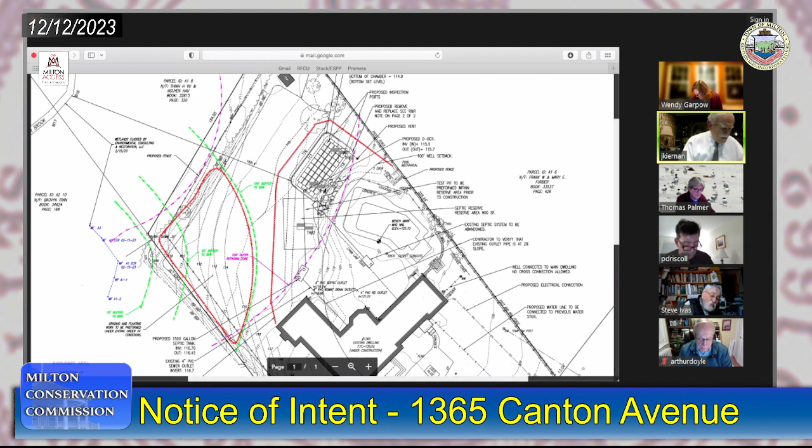I'll move, Mr. Chairman. Thank you, Mr. Doyle. Is there a second? Second. All right, thanks Tom. Any discussion? Hearing none, individual votes: Arthur Doyle, yes. Tom Palmer, yes. Wendy Garpow? I'm sorry, Wendy, I didn't hear you. Yes. Okay, thank you. And John Kiernan is a yes as well. So you have your order of conditions. Great, thank you very much, appreciate it.

All right, thank you very much. Item 8 on the agenda is approval of Conservation Commission meeting minutes.

I read the April 11th minutes. Well, let me ask this: did everybody read them all? Honestly, I did, and I noticed that May only refers to the fact that we didn't meet and refers us to another date for the actual business. Did you notice that? No, I didn't. I read the April, but I did not read the May, so I apologize for that.

Well, it does seem like May is sort of missing, because all May says is we didn't meet because of town meeting. Yeah, but we pushed it a week, didn't we? Yeah, but then there's no minutes for the subsequent date. See what I'm saying? Yeah, no, I do.